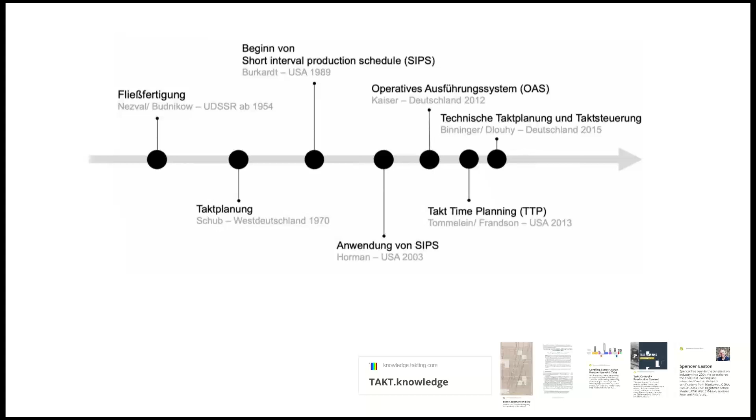So from here, the origin obviously predates CPM, like I talked about, but the principles and the system in which it's founded come from lean principles. It comes from lean manufacturing. It has its roots in the Toyota Production System. It has, obviously, takt time. That's one of the major tenets. But the concept of one-piece flow and takt time combined with pull is the sweet spot of takt planning. So the principles of takt planning are those three, which happen to be the lean principles.

I'll show a subsequent slide of the lean principles, the person that we learned it from, Chihiro Nakao, who was second in command at Toyota when Taiichi Ohno was creating the Toyota Production System. So some really great grassroots translation that we've gotten from Mr. Nakao. The idea of takt planning, you'll see at the bottom of the screen, going left to right, is taking the traditional standard project structure and trying to create more order and standards for our program, for our project, whatever level you're applying it to.

And you see a standard structure. You might have different activities that are linked. You have other things that are just riding the data date. That's typical chaos that we see in a standard production schedule using CPM. And as we get closer and closer to order, whether we're doing Last Planner System or some other things that try to organize things, we see more structure come. And really the idea that we're going for is structure and stability with standardization in the middle right here. That's the typical flow that you'll see with a takt plan, on the takt planning side.

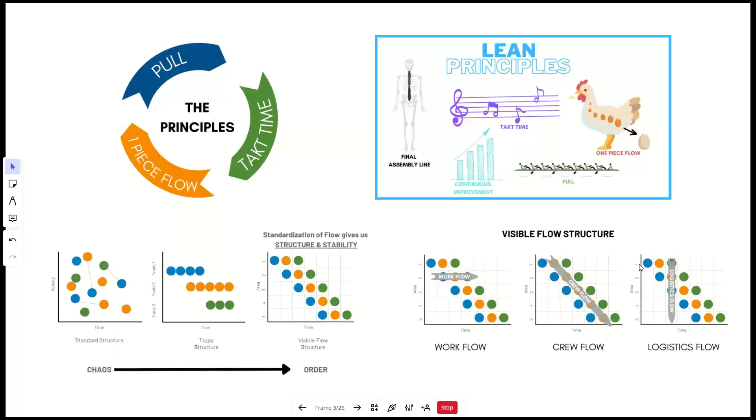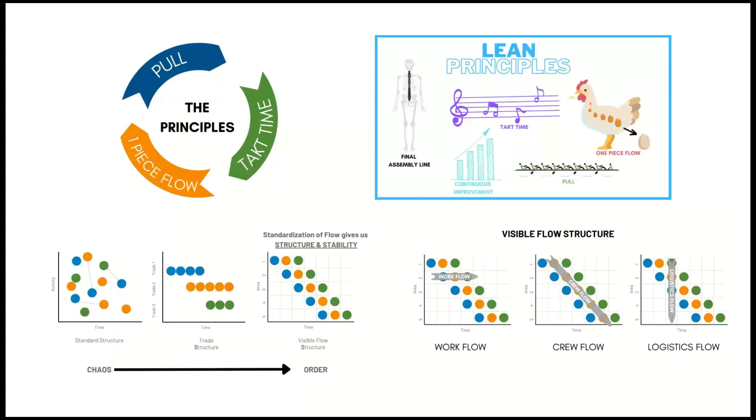And then you would have the logistics flow or path of construction, meaning you would do this area first, this area second, and so on. And that would be the order in which you would do that work. So that's the view and focuses that you see from a takt plan. At a high level, there are some terms to talk about. And this is where the connection starts happening with work packaging. There are four major terms, and usually the idea of takt planning is related to a train.

And you can see obviously the sequence in this train, and each car or each box or each set of wheels has an amount of work packages that can happen within that time. So that is referred to as a wagon. So this wagon idea is something that can house multiple work packages, a single work package, or no work packages.

Work package obviously is what we're talking about, a definable feature of work that is completed by a crew, right? So if that crew is going to go do that thing over the entire project, that activity or list of activities or set of work that they will do is what is defined as a work package. Work step is the standard work process for that work package.

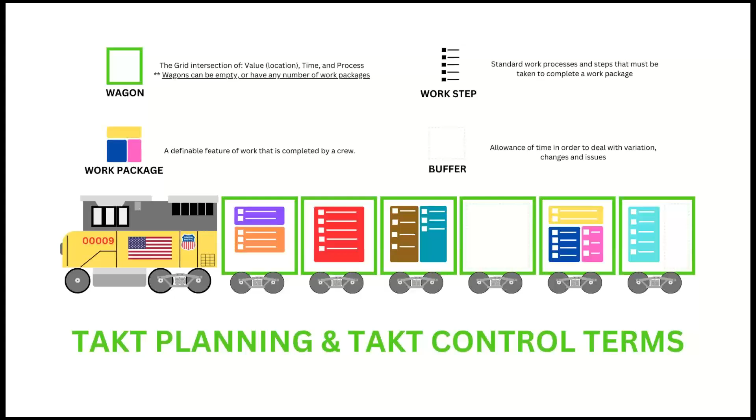And buffer is obviously an allowance or something to deal with the variation or issues or risks to a project, and understanding how much or little buffer is important. And we can actually see that within our plan. So these are some of those general terms. I have a little bit more in-depth slide that shows you some examples.

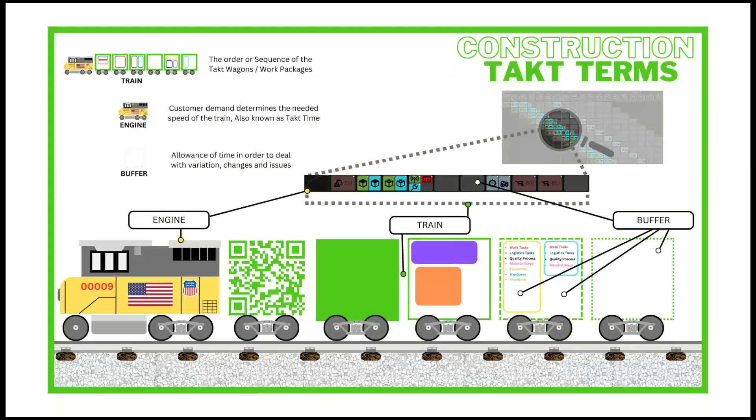Like I talked about, the train is kind of that sequence. The engine is what's setting the takt time buffer you can see in there. And if we were to zoom in on a takt plan, we could see that sequence of work. You can see the wagons, you can see the work packages.

And if we were to explode one of these work packages, and I go to the next slide, you can actually see, if you were to click on one of them, the integral steps within, whether that's work steps, logistic steps, quality, material, so on and so forth. So the work package really does become that nucleus of information, kind of like what we see in advanced work packaging.

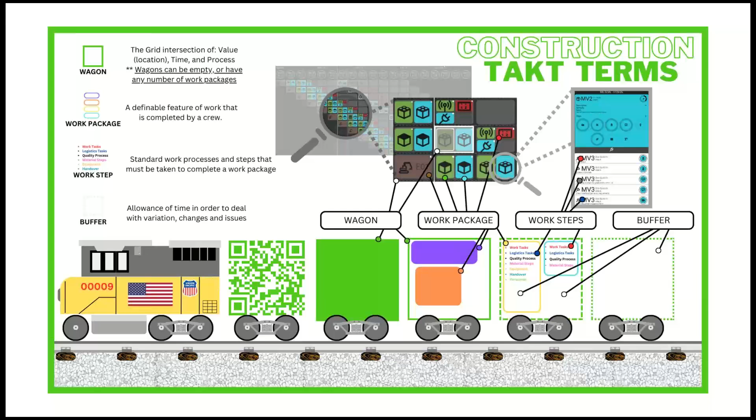So all of this culminates in one overarching production schedule, which could be for a project, it could be for a phase of work, it could be for a certain portion of a phase of work. So it could be done at any level, and it creates the backbone or structure for our production. Hence why takt planning really is synonymous with production planning.

It's trying to understand what pace we need to all hit in order to hit the overall production, and coming up with what are the work areas or zones that we need to be working in, what are the tasks and the sequence thereof, and all of the subsequent things.

And when I say all of the subsequent things, I like to think of it in this fishbone diagram, where the production schedule or the takt plan is the backbone, and all the other subsequent things or things that need to come before, like billing, buyout, procurement, design, engineering, logistics, all those things, they do need to happen, and they do need to be aligned with production.

So if it's not hitting at the pace or giving all of these bits of information to that individual either wagon or work package, then we're not going to be successful, which is why I think that's the other thing that really aligns work packaging with takt planning and takt control.

So I have a couple real life examples that I want to kind of showcase. First, I'm going to start off with a little video. If not, I'll talk through the example of the little quick video, and then I have a bunch of other case studies that I just quickly go through so you can see the examples of what it looks like in some different types of construction projects and industries.

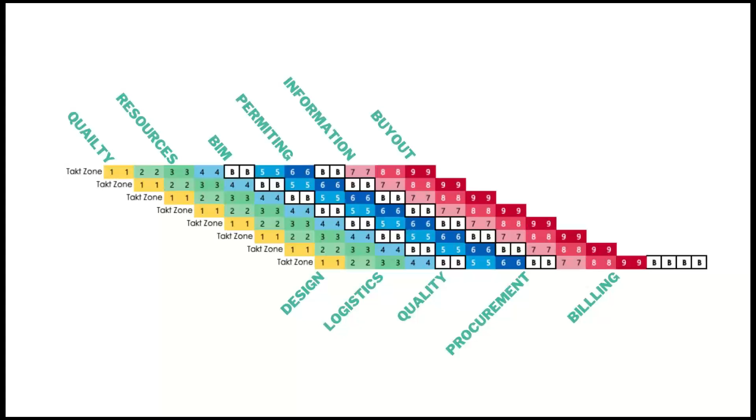So we'll go from there and see if this works. So I'll need some feedback to see if we're hearing the sound and audio from this right here. I'm not hearing any audio. Nothing? Let me check one thing really quick. I'm unable to share it really quick. Well, I'll just talk through it. Show, share, audience view. I might just hit play and go through this. I'm not seeing a way how to do it. So we'll just go ahead and continue, hit play.

So this is an example. This is a quick little 2-minute video that we share with folks inside and outside of the company that I currently work for to try to help them understand what takt planning and takt control is. At Mortenson, we call takt planning and takt control flow construction. And so you see the icon here, we break it down into the parts, which is the system is to help us plan, schedule, and execute work.

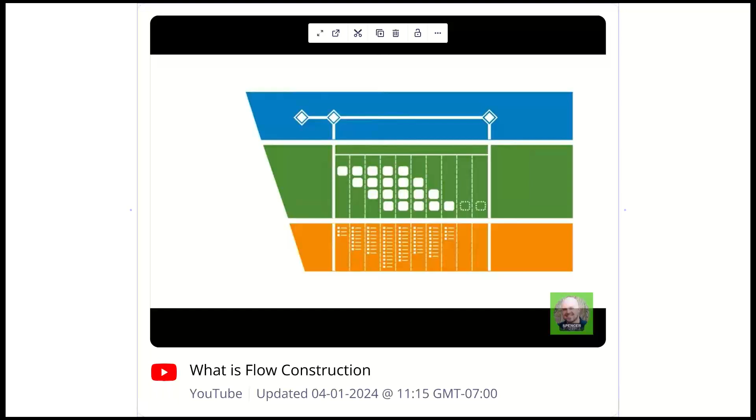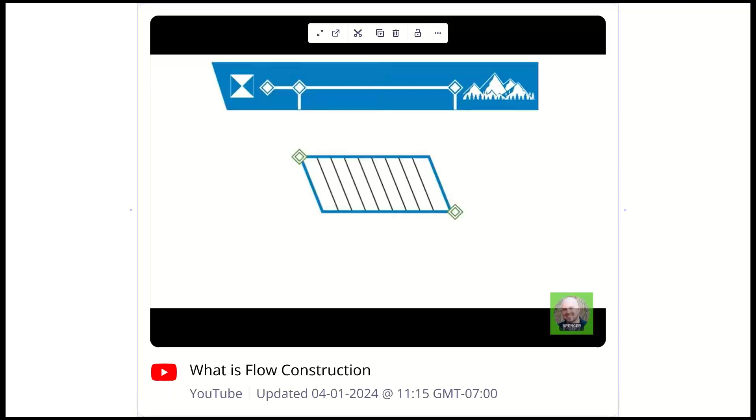It helps us understand that pace that I talked about originally and what it takes to hit that pace. And so at the high level, early on, before we have trade partners onboarded, we try to figure out how many phases of work there are and how the flow of that work is going to go. Is it one major phase? And how do we have all trades working together? Or is it multiple phases to get to the overall duration that will give us the best flow of work?

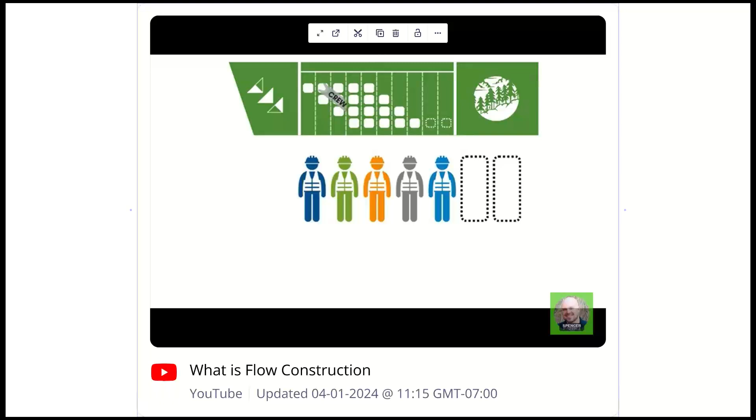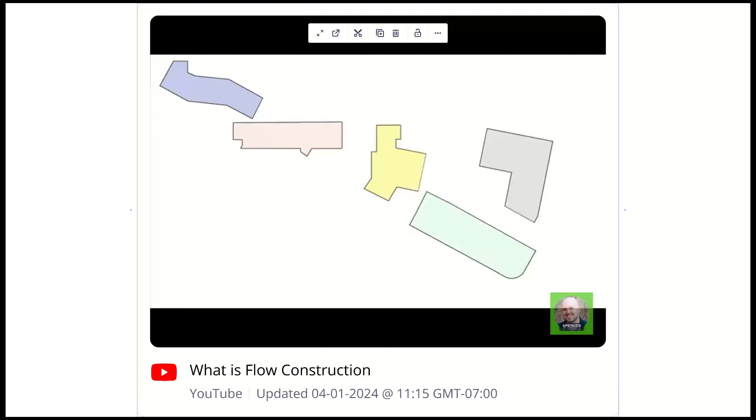We also talk about at Mortenson how we build that workflow with trades. So if we have that early on strategic plan, how do we onboard trades to get the best workflow and crew flow? So when we start, we usually break down the scopes of work into zones that we'll be able to build the project in, and then get everyone aligned to a common pace so that everyone is able to flow at the same pace. And there's lots of different ways to pull those knobs, but the best way is to plan at the next level of detail.

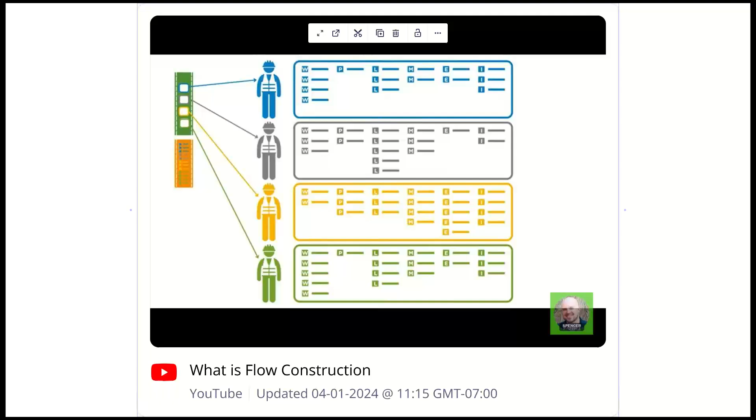So this next level of detail is that kind of sub-step level where we're going into, if the work package has a lot of different data and information in it, what work steps do we have? How many people, logistics, material, equipment, information do we need for each work package so that we can understand if the activity is going to go and if it's going to be successful. Hence why we'll need to be focused on removing roadblocks ahead to make sure that all of those things are answered, that we can actually do that work when it comes up.

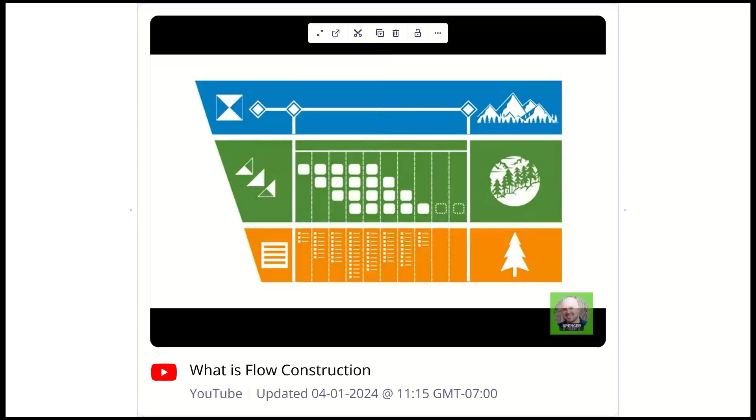So this is an example of us trying to communicate to our trade partners, to our owners, and internally to teams that haven't used it yet, how we as Mortenson are redefining what is possible, which is the utilization of takt planning and takt control. So here's an example of a tool where you can see the flow of work, the flow of trades, or the crew flow, and the logistics flow. So you can see the idea behind having a work package that is repeated over and over within a certain space, within a certain area. You see how that's kind of shown right here.

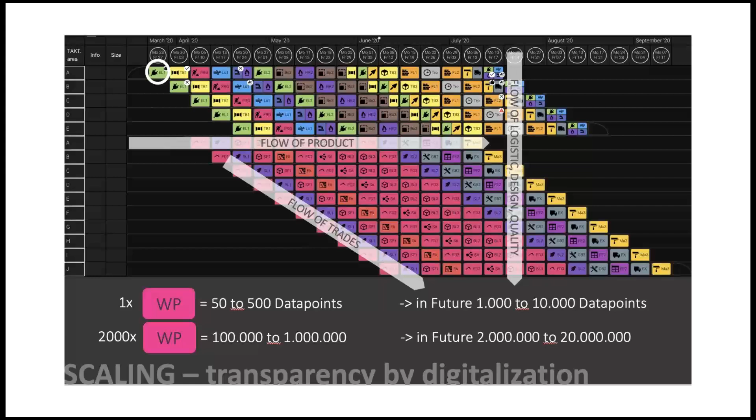When we jump into actual real life examples, the earliest that I can find to be able to share here is actually the Empire State Building. So if we think about it, looking at the line of balance, which technically this is a line of balance chart, when line of balance aligns to a common pace, it is a takt plan. So if everyone's going at the same rate, which is what you see here in the middle example, this is the aligned production schedule for the Empire State Building, and why they were able to produce so fast is because they aligned production and were able to minimize the gaps between the work.

You can see the workspaces or the zones or construction work areas in which they broke down not only the levels, but each floor down into subsequent areas, which is all hand-drawn, by the way. And then you can see photographs of how that flowed within, I think this is a week or 2 week snapshot between each one of these.

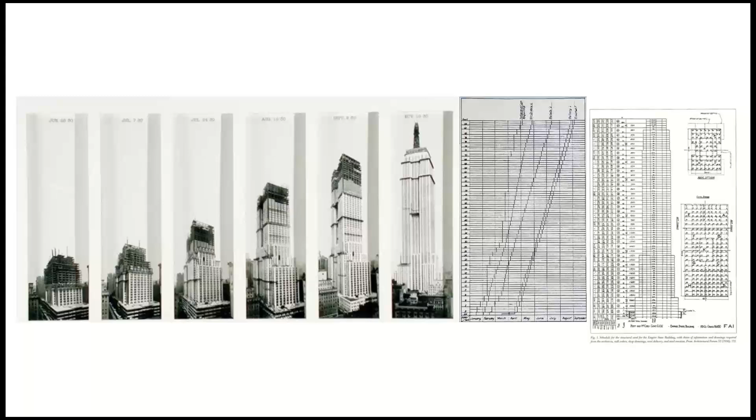The crazy thing is I believe it was 13 months, or someone maybe can correct me on that. I think it was around 13 months that the Empire State Building took. It was completed from nothing to complete space, meaning people can occupy those areas, drywall and everything, within 13 months, which is something we can't touch today. And it's crazy that we went from this mentality and we went a different path. So here's a great example of using the same concepts to achieve an amazing flow of work.

The next example that I have is by Hensel Phelps. So this was their Pentagon renovation project. They call it a SIP schedule, but it's the same concepts of breaking down the work zones, understanding the sequence of tasks, getting to a common pace, and then flowing that work from one place to the next in those 3 major flows. So great example here of this project.

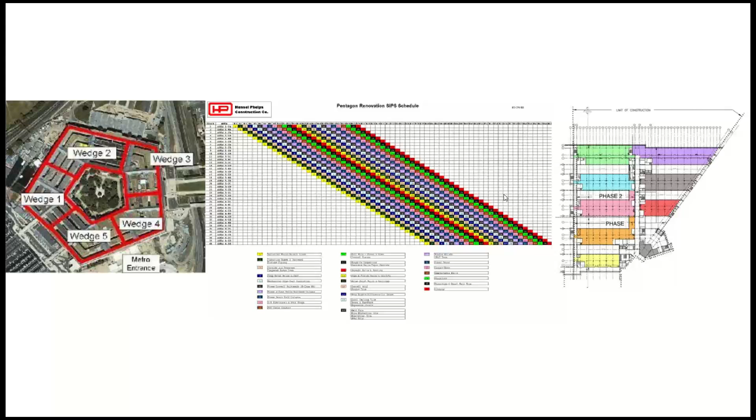Now this next one is one that I personally was involved with. And this was an $80 million hospital project, a couple different buildings that were stitched together, different types of work. And this particular team was using the traditional method and decided to switch to a takt plan to recover a project that was 12 weeks behind. And not only did we recuperate those 12 weeks, but we finished a week ahead of schedule and used the example right here.

For those of you that will be able to have this link, there's a little testimonial from this team, a great little example that you can click on and learn and see the actual example here and have them walk through. A great thing that they did is they had little cards for every single worker on site that had this Takt plan, and everyone had it in their pocket, and they made it a fun ordeal for everybody, kind of testing them. Hey, where should the electricians be next week? The first person to come up with the answer got a prize, stuff like that, making it fun.

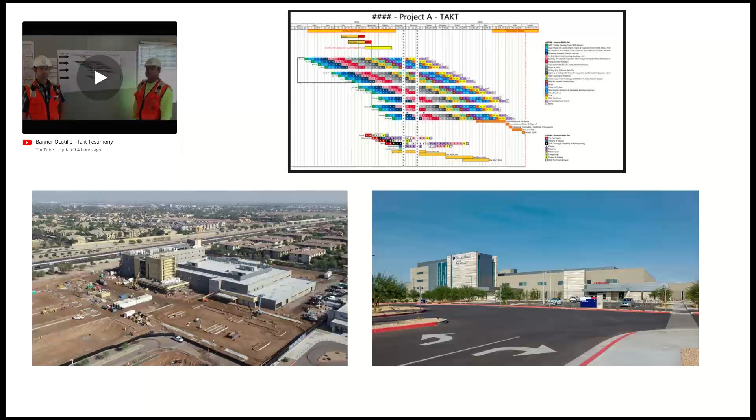So that's an example. We have another hospital example. This one was actually on a Native American reservation. And again, I have a couple other videos down here that you'll be able to look through and watch and see how this team used the Takt plan. They used it in conjunction with the Last Planner System, which was really great. And understanding their flow of materials was another big thing.

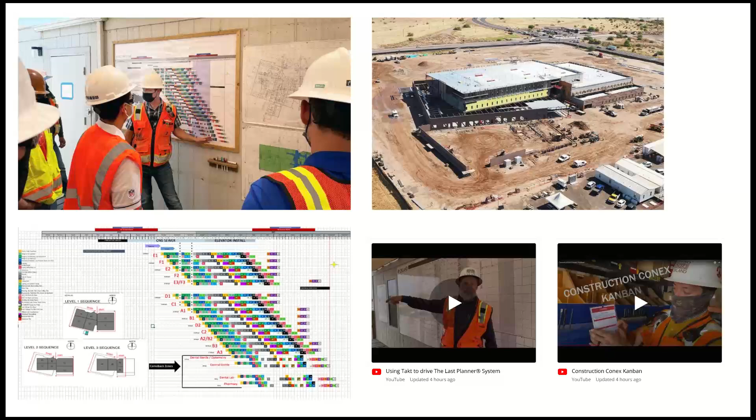So they really had a great time diving into the first example that this company had with the idea of work packages. So not just a task that needed to happen, but understanding all the underlying data that would need to be housed in that task. So really fun, great example on that one. And then I have a screen that will kind of be overwhelming. This was all I wanted to fit on a screen.

I've successfully helped over 300 projects implement Takt planning, from a lot of different industries, from a lot of different types of construction work: manufacturing, a little bit of oil and gas, some energy and infrastructure jobs, sports and entertainment jobs, office building jobs, assisted living jobs, a little bit of everything. So you can see here that it might not look exactly the same, but you see the concepts that I've been referring to and how they're applied across different industries.

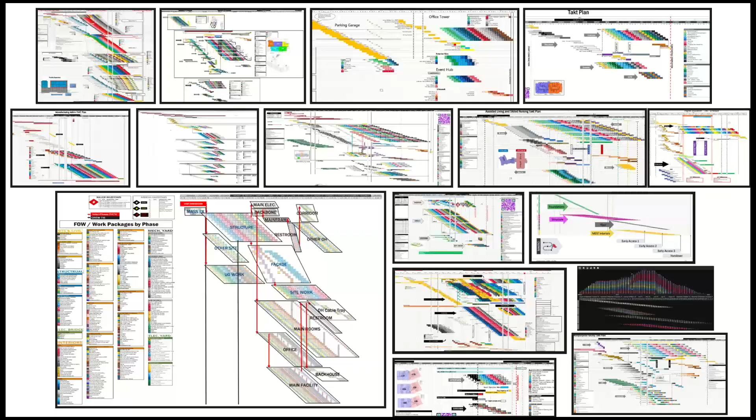So now that we have a base understanding of the idea behind Takt planning and Takt control, I wanted to dive into the center structure for Takt planning, which is the connection point between work packaging and Takt planning: the work package. The work package is kind of like the nucleus for Takt planning. It's the scalable, repeatable thing that will happen from area to area or zone to zone. And that's the idea. We're trying to find the similarities. What is the same that we can flow from space to space? And how do we standardize as much as possible?

A lot of times we only see the things that stand out to us, which are the differences. And sometimes we take for granted the things that are standard. A lot of times the standards can get us a majority of the way there, or if not, take a big chunk of the workload off of us, which is why understanding the implementation of work packages within construction, both from the advanced work packaging side and the Takt planning and Takt control side, helps us get to a more streamlined, optimized flow of work and execute better, with the work package being the central standard.

You can see there's a bunch of different ways to think about this. I have 4 different categories here, whether it's the content of the work package. This is where you see the combination of engineering work packages. You see design steps. That's the same type of concept. So the work package itself isn't necessarily each individual type of work package like we see in advanced work packaging. It's an overarching work package that houses all of those individual work packages, or information and content that would need to be created, curated, or coordinated for the work package.

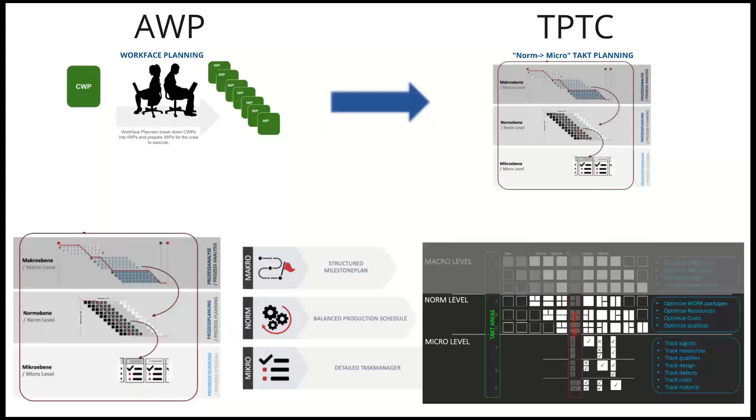And then from there, we dive into an ongoing planning process of getting down into the micro level detail that you see down here. And you see the same type of visuals down here. You see this macro view, and the Germans call this the norm view, or this middle view, that work package view. And then down into the micro level or the steps level, where we're getting down into that IWP type level planning, if that makes sense. We also have another example of some good cross processes from path of construction and construction work areas. So that's how it's talked about in advanced work packaging.

Obviously, we have similar type things with what we call logistical flow. That is the path of construction. So you're moving from this space across here, up this direction, or you're doing this and then that, right, type idea. And those things that you're doing, or those places in which you're doing the work, are the construction work areas, i.e. the Takt zones.

And people call those different things. They call them areas, they call them zones. But the idea is still the same. So when I learned this from the AWP side, I was super excited to see that we're all kind of going down the same path of defining the space and scope of work down to that really, really great level.

I have kind of a GIF video here. It's not playing, but here's an example of a Takt. Oh, there you go. So you see down here in this bottom right corner, as you click onto the different work packages, you're seeing the integrated BIM model into this system, which is called Takting. And you can click on each individual work package and it's showing you the parts and pieces that you have connected in your actual model.

So as you click through it, you can see not only the construction work area that you're working in, but the actual IWP that is connected to those individual work packages. So a really great system to help you visualize some of those same things that we talk about between both systems. And these are some other examples.

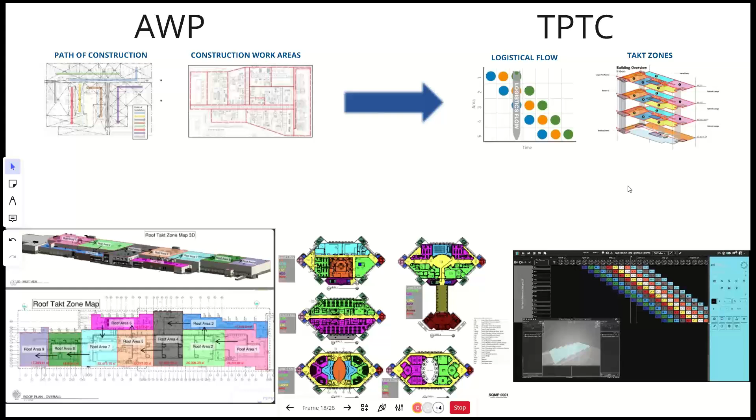Here is a specific task where we broke up, okay, let's take 5 tasks or 5 work packages, and let's flow those 5 work packages that are up on the roof. Everything from the actual roofing membrane to lightning protection, like everything under the sun, all the things that really needed to happen majorly on that roof. We went through and figured out how that flow of work would happen and the path of construction in those different construction work areas. So hopefully you can see that kind of comparison and how they kind of support and contrast each other between the two systems.

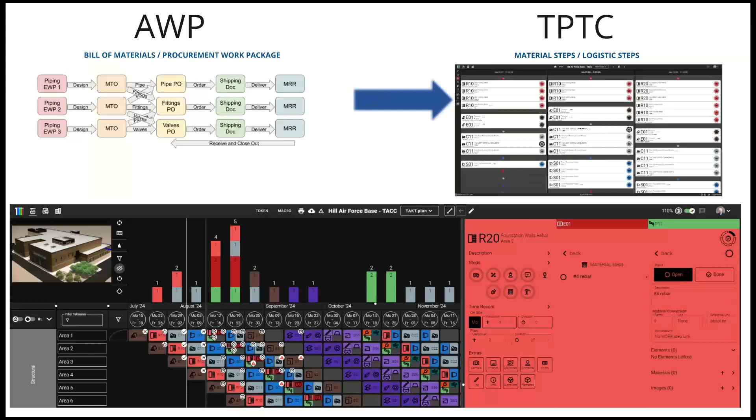So another great way to make that connection point between what we're doing with material procurement and what we're doing with execution, and how that kind of works similarly between takt planning and takt control and advanced work packaging. We also have backlog, which I talked about. And this one's a really, really awesome visual one on the takt planning front.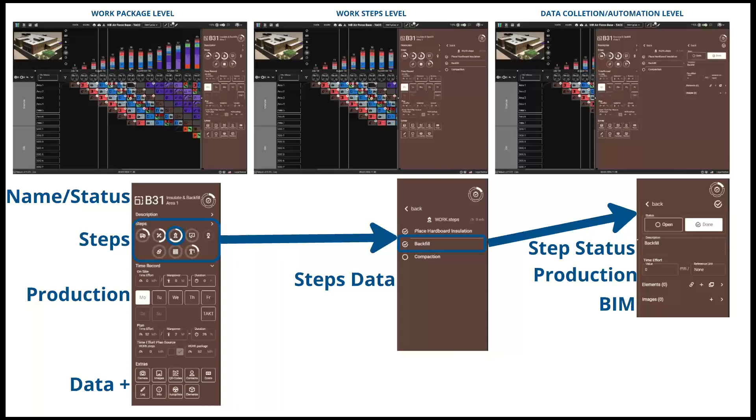So one final thing I wanted to talk about with regards to Takt planning: when I hear Takt plan, in my brain I hear work package visual. So here's a more zoomed in visual of that same system, but this is that idea that I started with, where you can see the wagons or Takt time by area. So the pace that we need to hit for each area within the process. And you can see each individual work package and the status thereof. So it's a really great visualization of those work packages in a production schedule or production plan type visual.

And so even though you might not know the names of these or what type of work it is, you basically get the gist by looking at it. The sequence of work, the flow of the trades, and the order in which it will go, if you could see the areas, which I didn't include here on the side, but you can basically pick up the gist very, very quick.

I've had a lot of trade partners, internal team members, owners, and stakeholders that we show this to originally, and for the first 5 seconds, they're like, oh my gosh, this looks like a lot. And once you spend about 60 seconds to help describe what the chart actually means, everybody that I've ever come into communication with understands it really, really quickly.

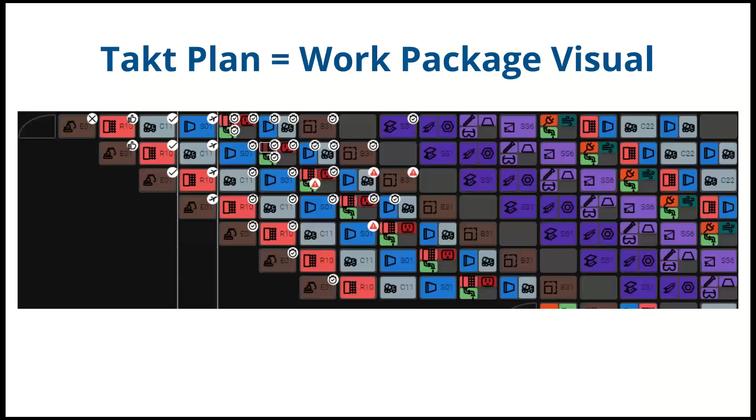I suggest 3 major things for anyone that is wanting to and willing to try Takt planning and Takt control, and I'll dive into each one individually. Learn the principles and system, 1 step at a time, and Kaizen. Let's go 1 at a time. So learn the principles and systems. There's lots of places that you can learn about Takt planning and Takt control. There's 3 main ones that I would recommend personally.

One, I'm biased because it's my platform, where I share a great system of how to understand the basics and concepts of how to start using it on your construction project. It comes with templates and great examples, and I dive into more depth on the principles. That's Takt U, or Takt University, that you see right there in the middle. There's a link to that online course. It's a 3-hour course, really streamlined, has lots of great content, so that's a really good source.

The Lean Construction blog is where I made my start. I've also written a couple of blog posts now on the Lean Construction blog, a great place to learn about Takt planning and Takt control. And the third one would be the Takting simulation. For anyone that has the opportunity to join one of these, I'll be posting about some times that I'll be hosting it, and there's also other times where other folks host this simulation. It's a great example of learning how the system works, how we plan, how we execute work. You see some examples up here of some of the concepts that we go through. It's a really great training tool.

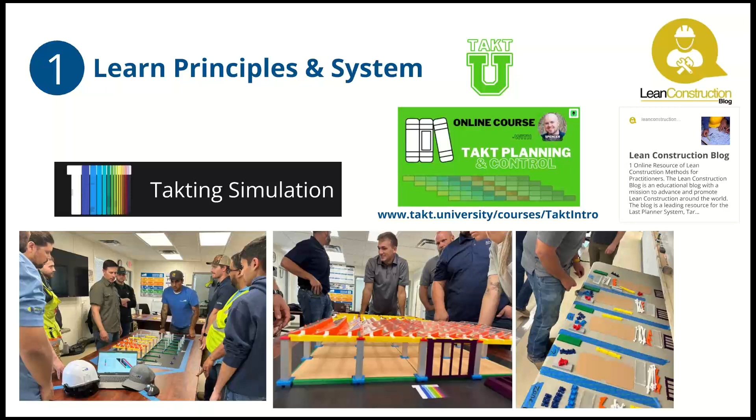This is done all over the world. It's done in Germany, France, Sweden. It's done in South America, in Japan, in the Middle East. Anywhere that a construction project is, this is being done. I think it is the #1 Takt simulation in the world that I'm aware of. So really great. Reach out if you want to join in that. So that would be #1, learn the principles and the system.

2 would be 1 step at a time. Don't try to implement the whole thing. It's just like advanced work packaging. When you go to implement, you need to be bought in, but it needs to be 1 step at a time, learning those individual concepts 1 at a time, because doing a whole new thing is hard in and of itself. And then if you were to use a tool or a system, that would be harder in and of itself. So understand chunks, understand one piece flow, understand one thing at a time, because it's not easy just to jump into a whole new system.

So take it one step at a time, do one step at a time, because that's how we get things done. We're kind of living by our own book on that one, if that makes sense. And the last one is, we're all on a journey, and Takt planning and Takt control is a try. It is us in the industry trying to improve our system and our way of planning, scheduling, and executing work, our way of production planning and production control.

And so while this is showing great benefit, it shouldn't be the end for any of us. And we shouldn't want to just replace CPM with a new tool. What we should do is look at the opportunities that we have in front of us and say, okay, this is where we're at. How can we continuously improve?

I have a picture of Mr. Nakao, who actually came to Mortensen the other day. This is the gentleman that was the second in command to Taiichi Ohno at Toyota. And he talks about how all things need to be thought of in systems thinking. And you see him on the little drawing that he drew up there. He draws the mountain, the forest, and the trees, which is why we try to adopt that into our thinking of everything's a system, and everything has different levels, and everything connects to each other.